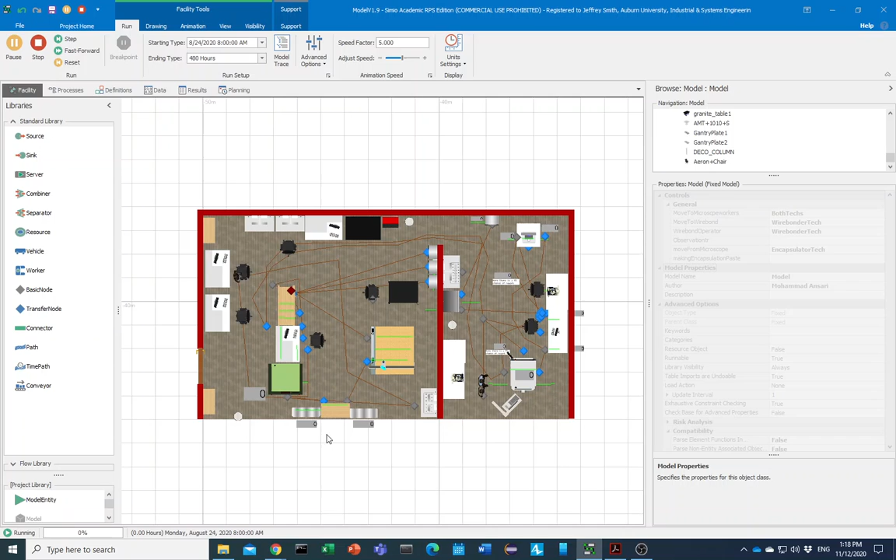So if we just play, as you can see, here are the cabinets that we keep the raw material, PCB, sensors, and base plate. So this is the base plate. After bringing all the base plates, they started bringing sensors, and now after that, it's time to just run the gantry. As you can see, we have 6 modules here. Let me just pause it here for a second.

So when the simulation started, as you saw, they brought 6 base plates and 3 base sensor plates of 2 sensors. Up front, they created a batch of 6 here. It will be sent to the gantry, and then one will hand the gantry. The other worker will start making the glue. After making the glue and attaching it, this worker is now working on the gantry again.

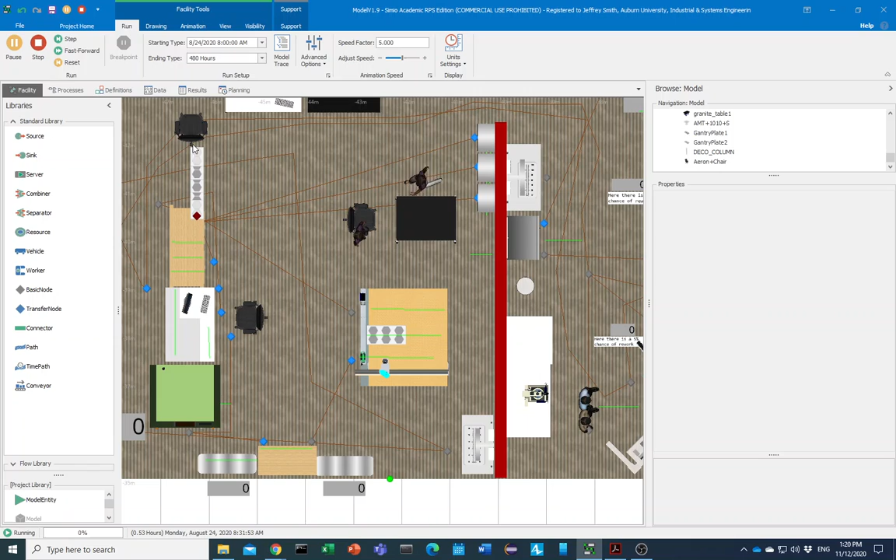This worker is free. It will go on and bring the next batch of the base plate and sensors. So if I just run it again, you can see that it's bringing up the base plate here. Base plates are coming one by one, as you can see, and after bringing 2, they create a plate of 2. But sensors are bringing in the batch in a plate of 2 together.

So now 6 is ready here, so a new gantry plate is ready, but the gantry is busy. After the gantry is done, which takes about 30 minutes, this one goes to the gantry. This worker will start making glue, and the next worker here will actually start working on this. So this model, we have 3 batches instead of 2, just to show the capacity of the system. You can change it, and I will show you how.

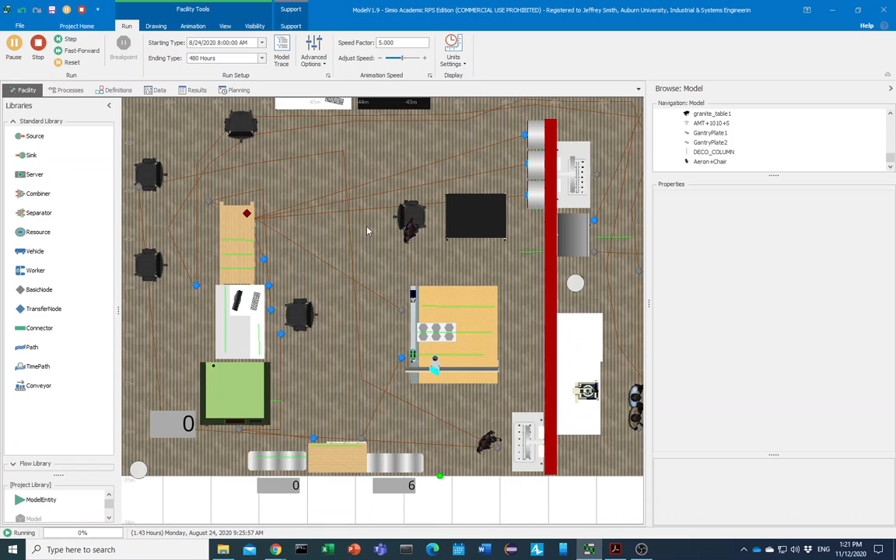Again, another batch of 6 will be coming. 6 base plates, 6 sensors. Then this one ends, which takes about 30 minutes in simulation time, as you can see here. So it should be any minute now. Yep. So again, a request for making glue, a request for going to the gantry and handing it. So the first day, 18 proto modules will be created. After these are created, they will go to here.

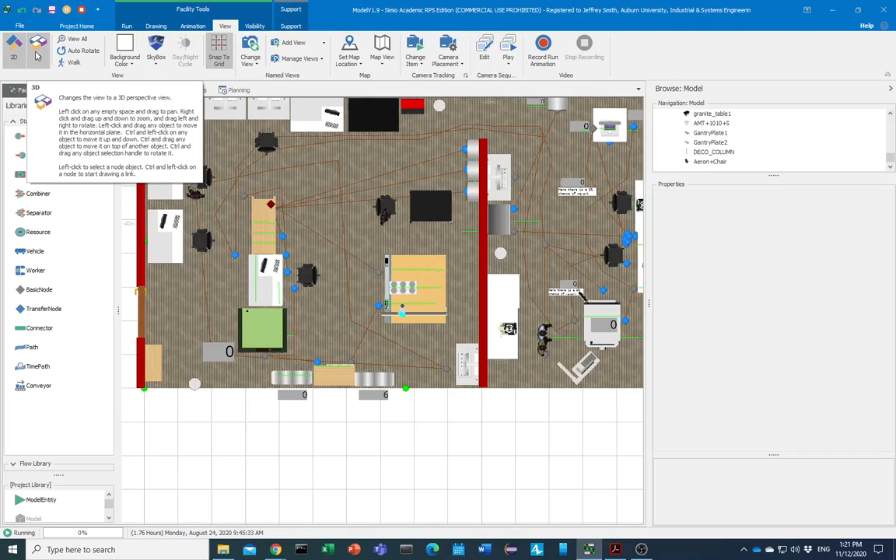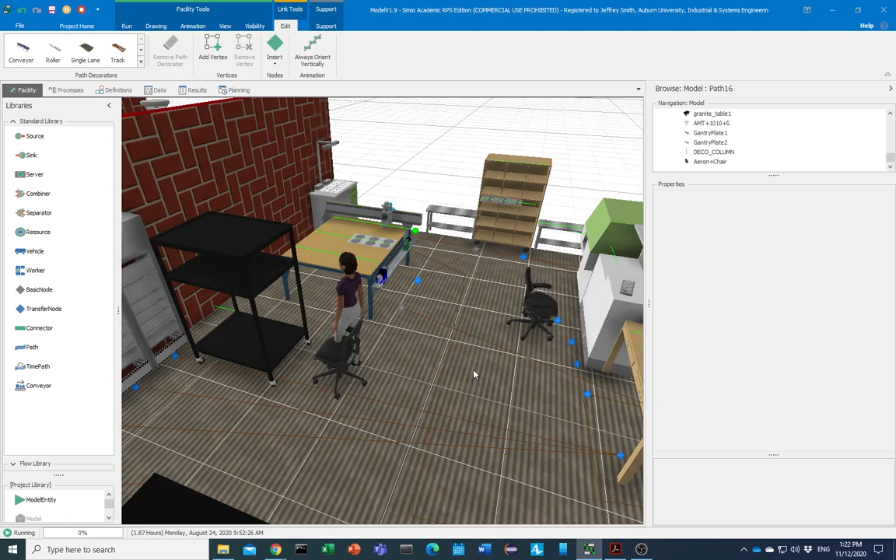So when they're done, I'm just going to go to the 3D model of the system. I tried to make this model as close as possible based on some of the 3D models that you sent me, and some based on the layout, the closest to the actual shape. So this is the gantry. The worker is here. If we rotate this, you can see that after these are all created, they will go to this cabinet here, and they will wait for the next day.

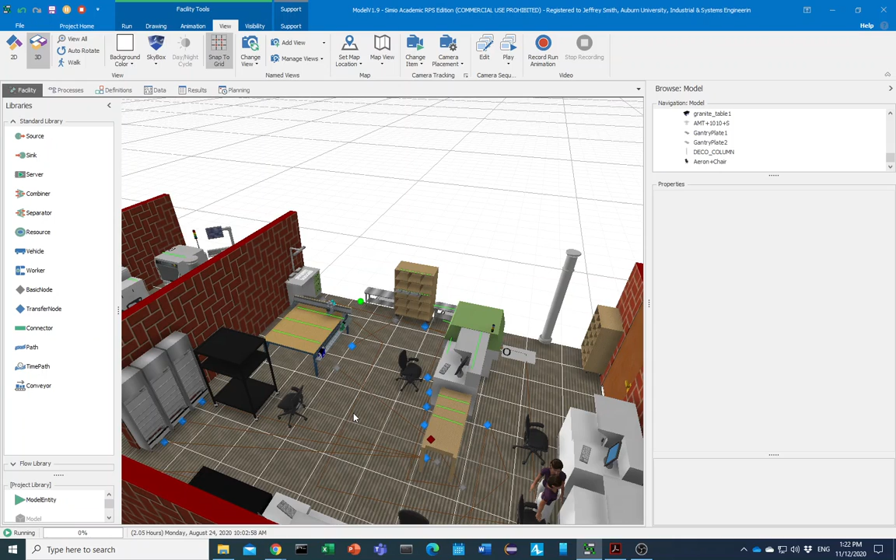This is the curing phase, which is happening. This will take another few minutes. Well, it's done. Now both workers are idle. They don't have anything else to do. They created 18 proto modules, but because this is the first day, they don't have any proto modules left from the day before. The rest of these as they were in the model here, they don't actually do anything. They're just kind of like cosmetics.

So we're going to go to the next day. I'm just gonna do it in a step, and a step will jump to the next event that will happen in the system, and I increase the speed to really fast. The next event that happens in the system is 8 a.m. tomorrow. So we run it with the speed of 5000. Well, it's now 8 a.m. of August 25th. It started at August 24th. So we decrease the speed to 5 again.

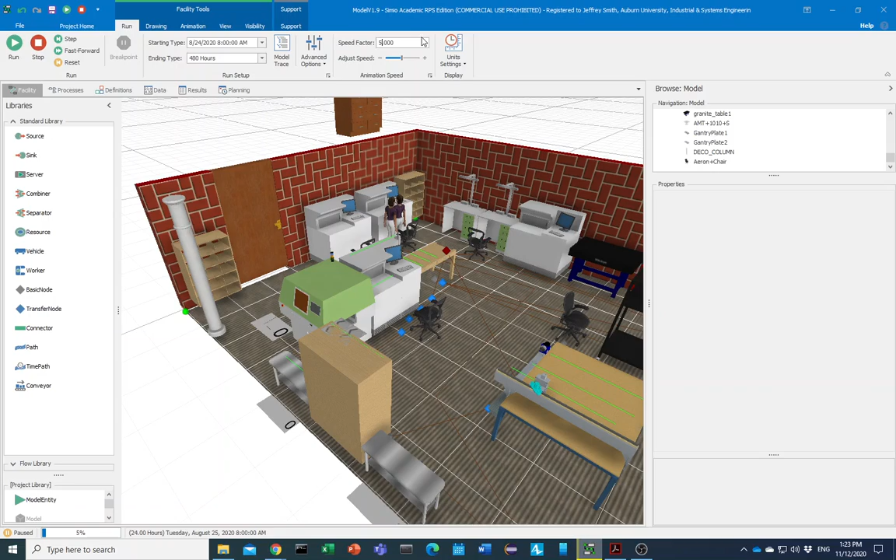So now what we need to consider is that we have 18 new modules coming in. Sorry, I just wanted to not show the links and nodes to make it more clean and clear. So yeah.

So the next day we have 18 new, 3 batches of 6 new products coming in, and we also have 18 in the system right now. So as you can see, this is the number entered into the queuing. We see that there's 9. So the numbers that entered in the queuing are in plates of 2. So 9 plates of 2, 18 entered to the system.

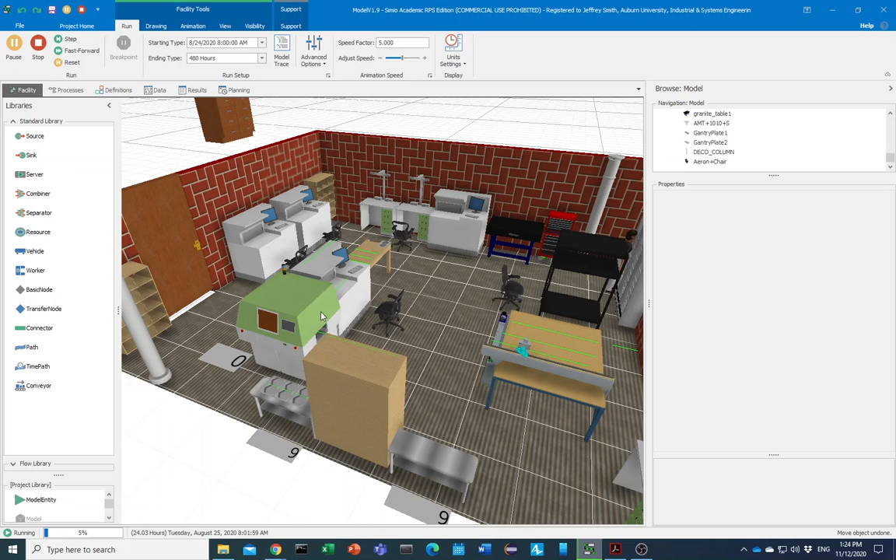And then let's start playing. So then the 18 from the next day are out, and they're waiting to be sent to the OGP, and we'll check for the quality. The first thing the workers do, they will start with the new batch here. They will bring up the new products all the way here, as you can see. And when they are moving sensors, they move way slower, because the sensors are more sensitive. Then a worker will pick something from the queuing, send it to the OGP, and start working on

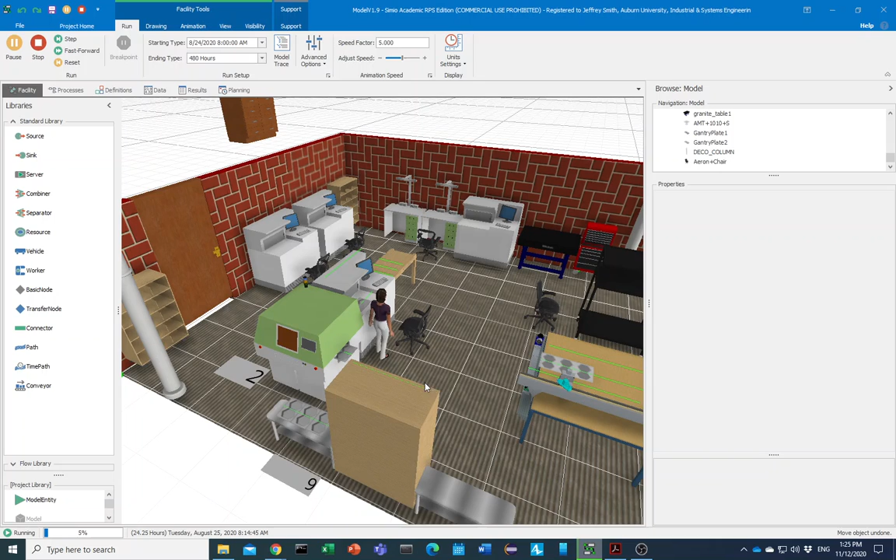the OGP. So as you can see, there are 2 products in the OGP right now. One of them is waiting, one of them is processing, and this is the output line. So one of them is waiting to be processed, one of them is actually in the machine. The one that is done goes here again. This worker is making the glue, the other worker is actually going to look over the machine and the gantry.

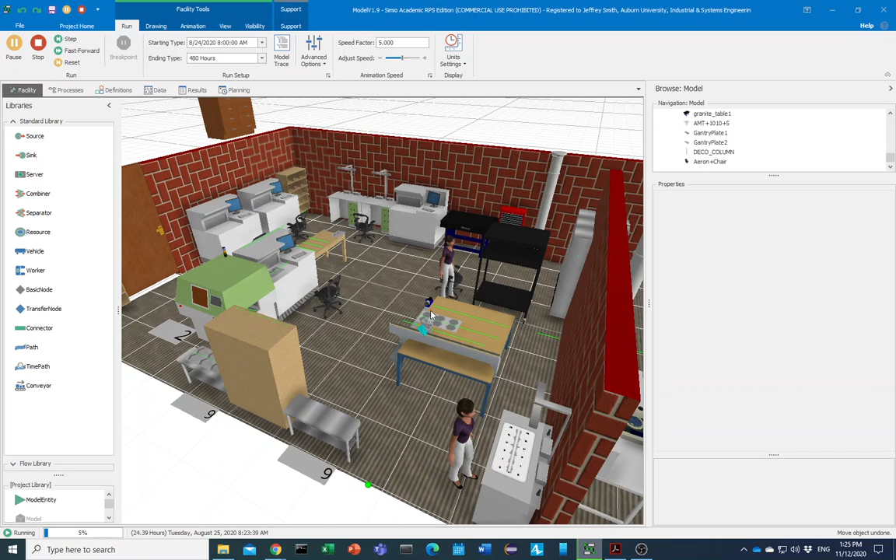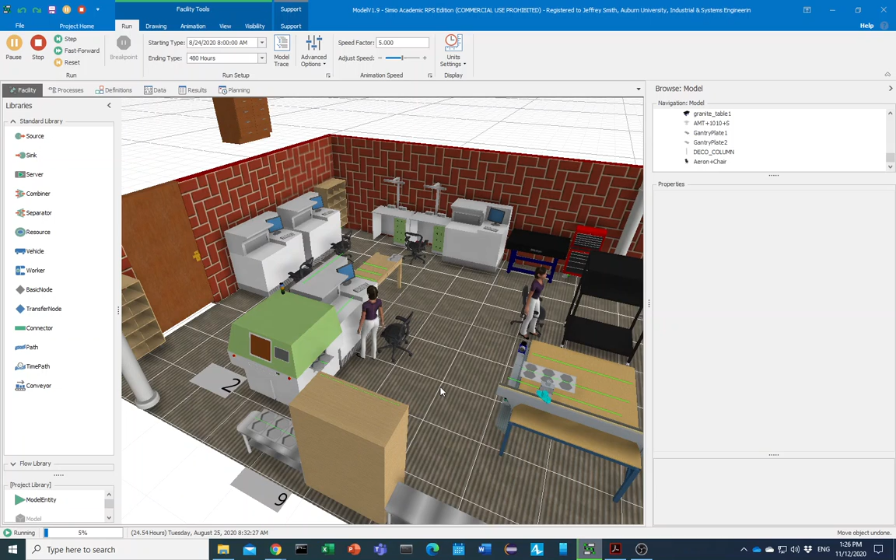So making the glue is done. Again, working on the remaining products that were processed and cured the night before. So the sequence of the jobs is not completely random right now, but they prefer to do the new modules first. But sometimes during their walk, they actually hand something on their way here, and then pick up some new products here. So as you can see, after handing whatever it was here, they started picking up new products.

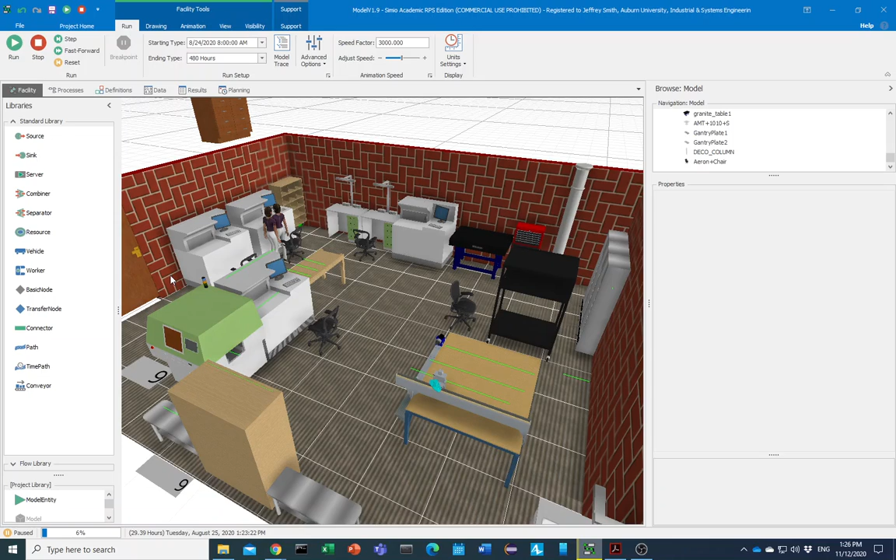So again, the second day we will not have anything going on in the second room, because we don't have any modules ready yet. So this sequence continues for the rest of the day, and let's jump to the next day. So we just increase the speed to 3000. Okay, this is 25 still, so we just go through, and as you can see, it jumps to 26 at 8 a.m. and stops. So let's just reduce the speed.

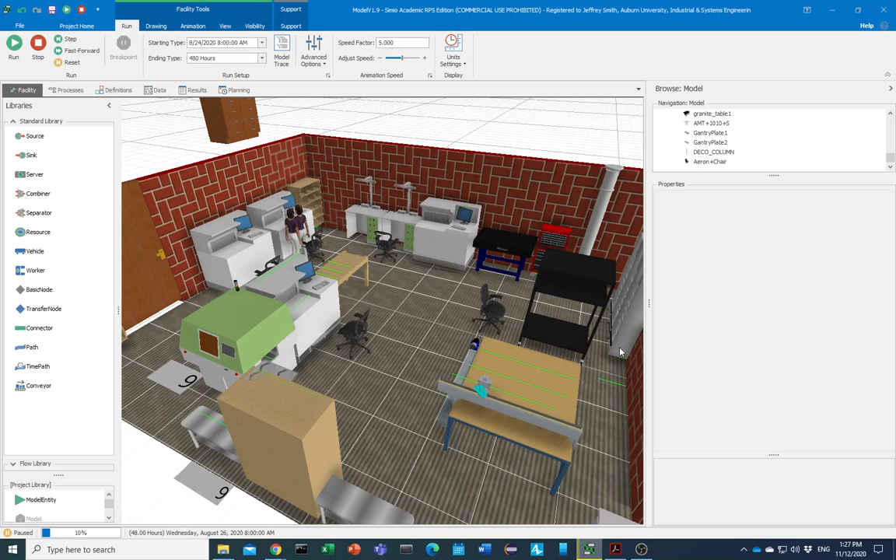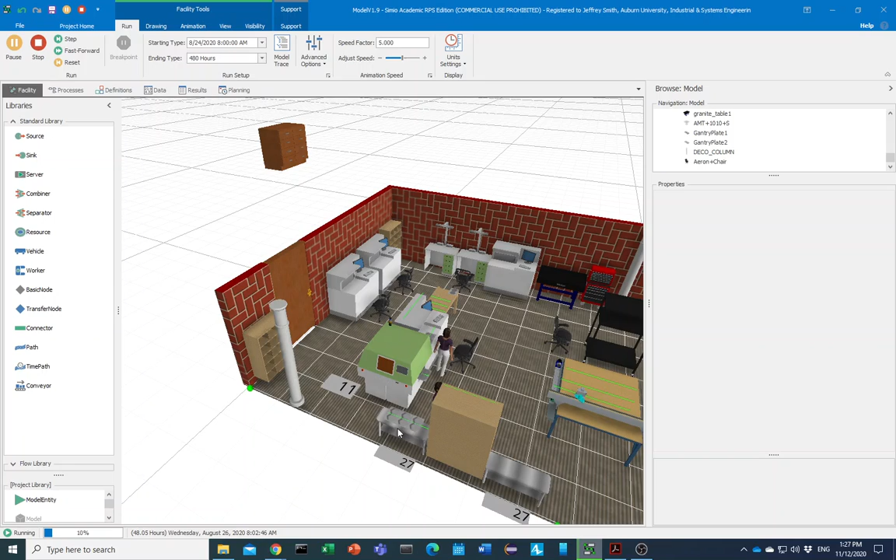So now we have 18 proto modules in the system, and we want to create 18 new proto modules. The gantry still works the same, but the thing that changes is the OGP, because the modules will be tested again before they are picked up by someone from room 2. So if we run it, we see that they will bring some of the products here. Then the priority is with the new product, so they will bring all modules, not proto modules. The modules, as you can see. Let me just pause it.

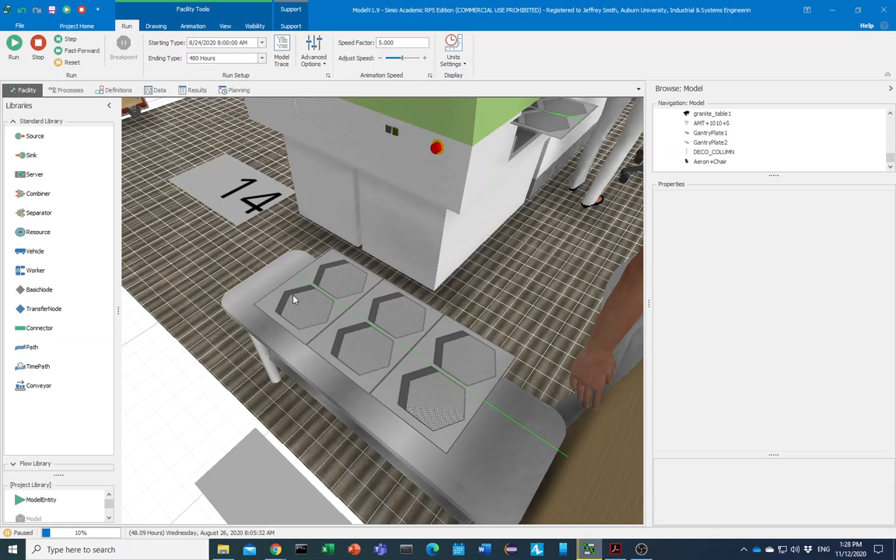As you can see here, the modules are 3-leveled, which shows the base plate, sensor, and the PCB. If you take a look at the modules here, these are the proto modules. They have 2 levels, just the PCB and the sensor. So this is how you can differentiate them. And for example, here these are just base plates. And if you hover over them, it actually shows that this is a base plate.

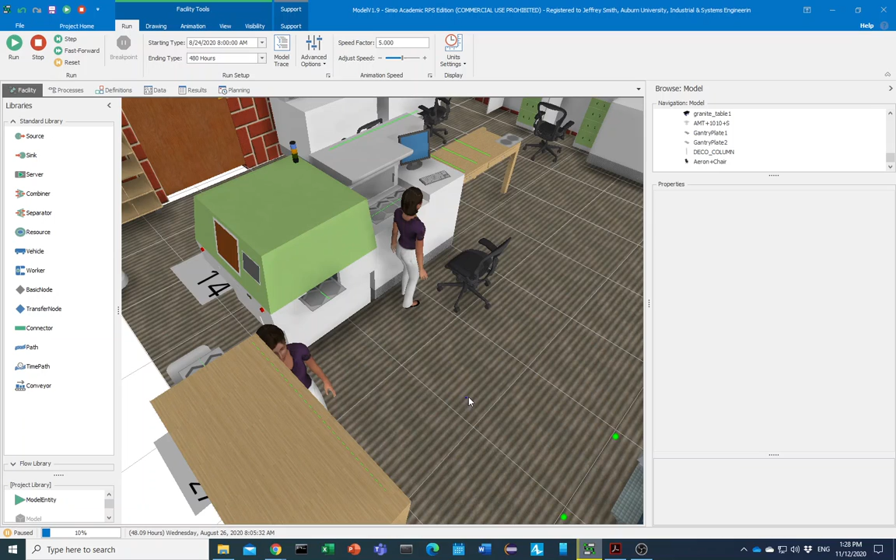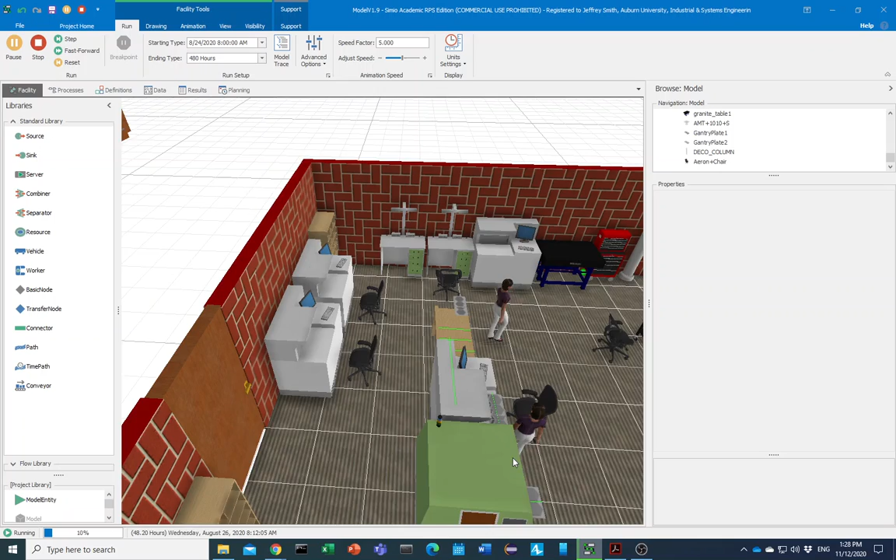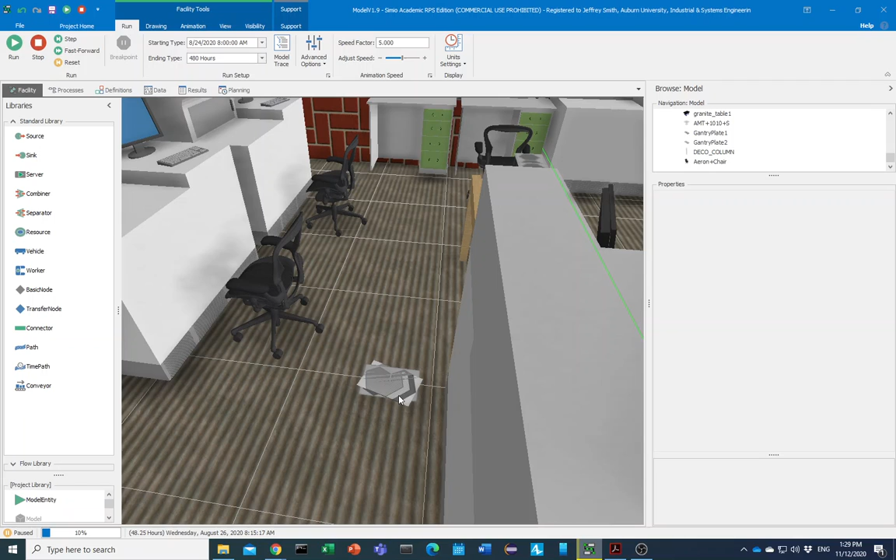Okay, let me just play it out a little, see how it goes. Again, they're bringing the modules into the system. They're picking up from the output here. After the module is checked for quality by the OGP, we will see that the module will go somewhere here and wait. So as you can see here, they are created. The OGP checks the quality 2 at a time in a plate, but after they are checked for quality, they will be separated into individuals. So 1 plate was checked, 2 modules will be created here.

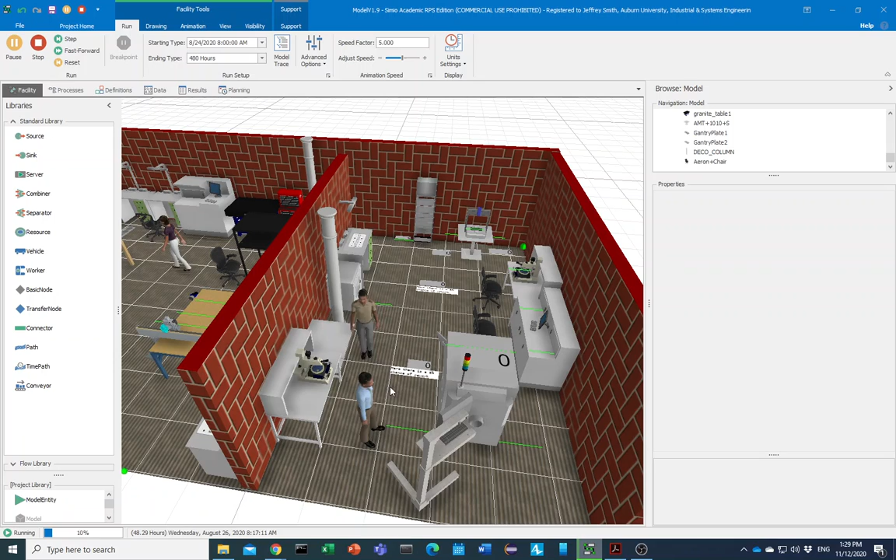After the 2 modules are created here, a worker from room 2, the wire bonder, not the encapsulation worker, will come here and pick it up. Comes here, picks it up, and carries it all the way here to the wire bonding machine. So he mans the wire bonding machine. After it's done, he will give it to the observation microscope desk.

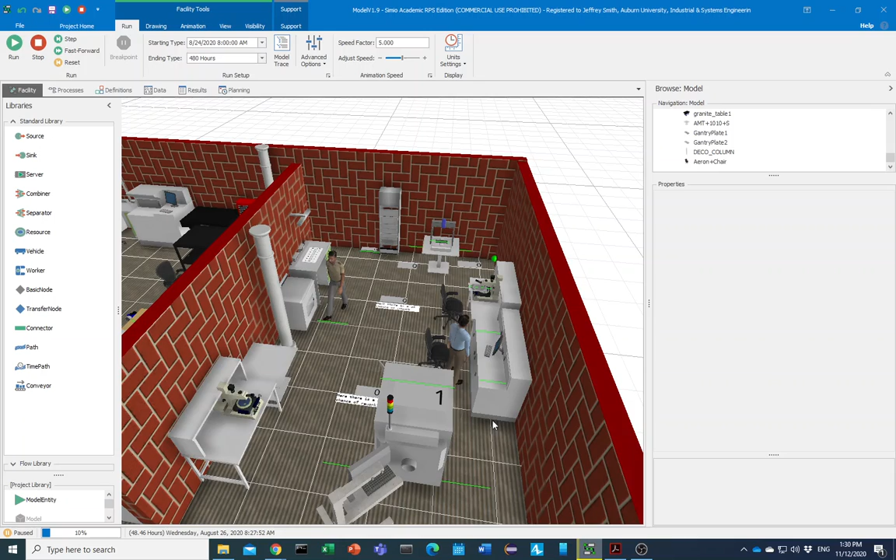So as you can see, the encapsulation worker doesn't have anything to do right now because he's waiting for products to come in. So we wait a few minutes, then it goes to the observation microscope, and it will check for the quality. And as you can see, this is the input line, so all products that need to be checked wait here. If they are being checked, they will go under the microscope here, and if they are checked and done, they will wait here to be sent to the next station.

So we will see that it will be done in a few minutes. Then after it's done, it will be handed over to the input of the mini gantry. The thing with the mini gantry is we have a limit, so it needs to reach a number of 4, 5, or whatever before the mini gantry starts working, because the paste gets viscous after like 60 minutes. So we just wait for a specific number to get there, then start processing everything.

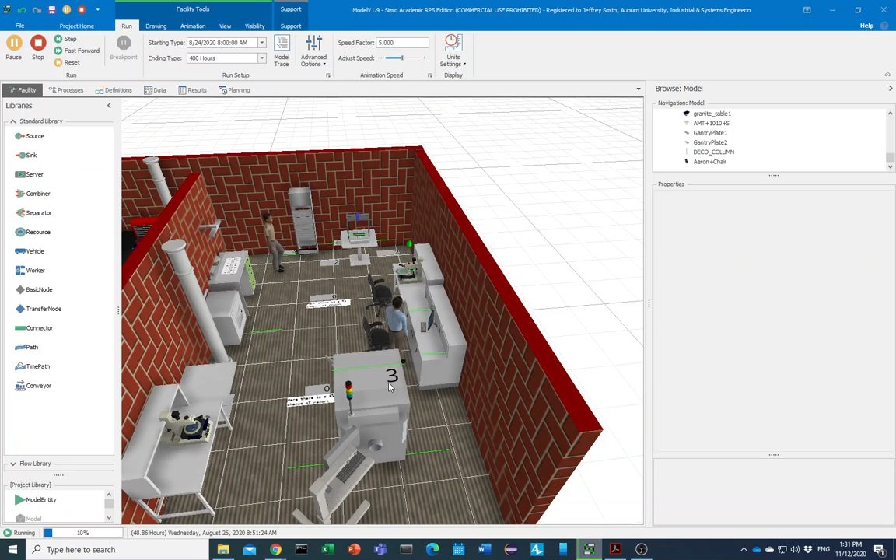Right now you can see 2 numbers are already in. This is the total number that entered the gantry, and this is the current number in the mini gantry. There are still 2, and 3 have been processed well, 4 right now - this is the 4th one. The first one is being wire bonded, and as you can see this is the proto module, empty. After it is wire bonded, I added these antlers or legs to the module to show that this is the wire bonded module, not just a simple module.

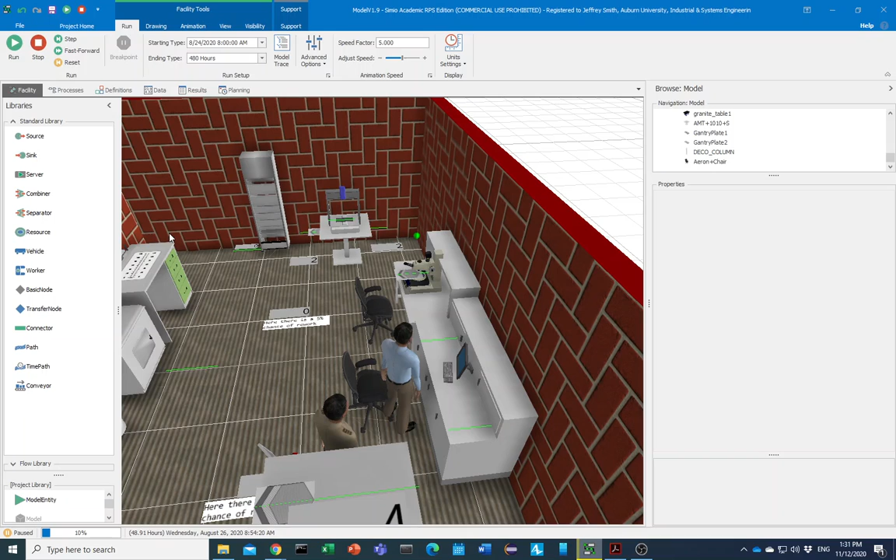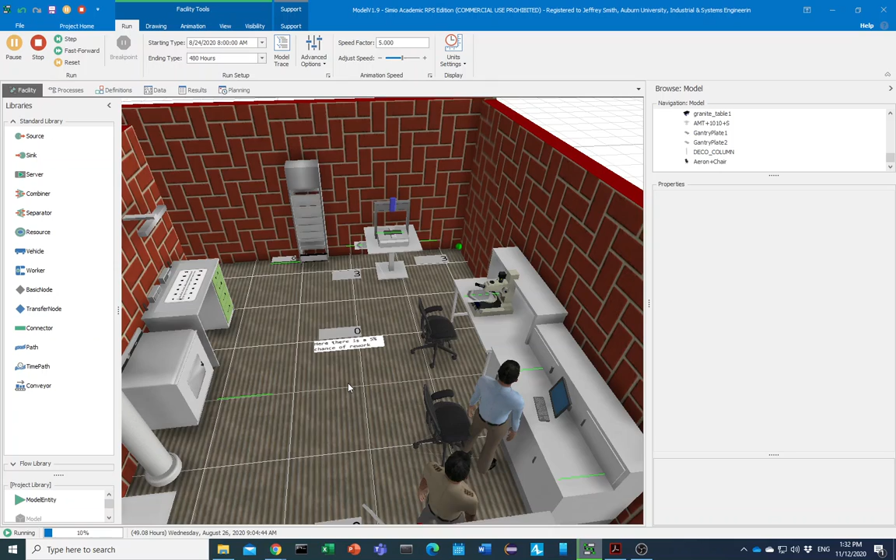Let us run, it will go. It's 3. Right now the setting here is 4, so it needs to at least get to 4 before it starts the mini gantry and makes a new batch of paste. So this is the 4th one, so this will happen really soon. After quality check and passed, then it goes.

When the 4 is met, the worker will go here to this station. He is making paste right now. After making paste, he will go there, attach the paste, get the paste to the machine, and start manning. As you can see, this is the amount of paste we have.

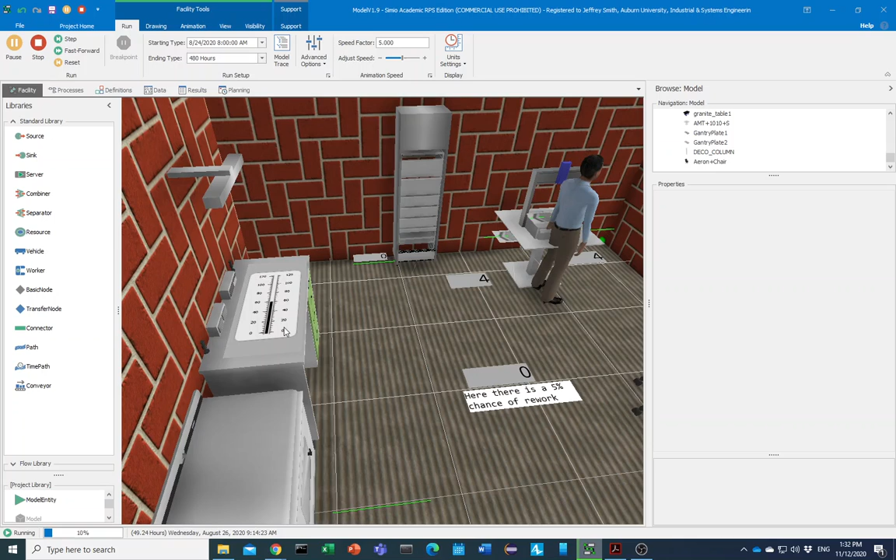So we consider that for each module we consume 20 units of paste, and the paste created is based on the number of waiting. So at 4, 80 is created. Right now 1 is here, so 60 is remaining. As every unit goes through this mini gantry, you will see this 60 drop to 40, 20, and 0.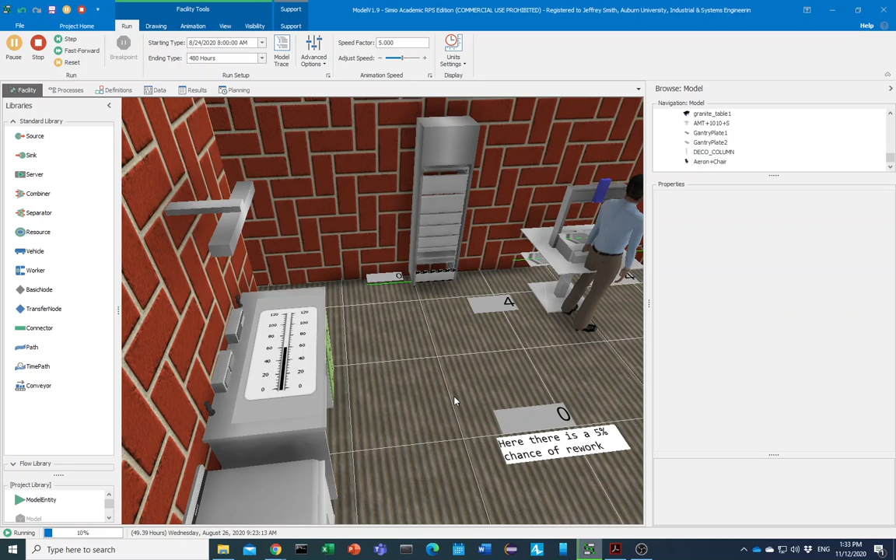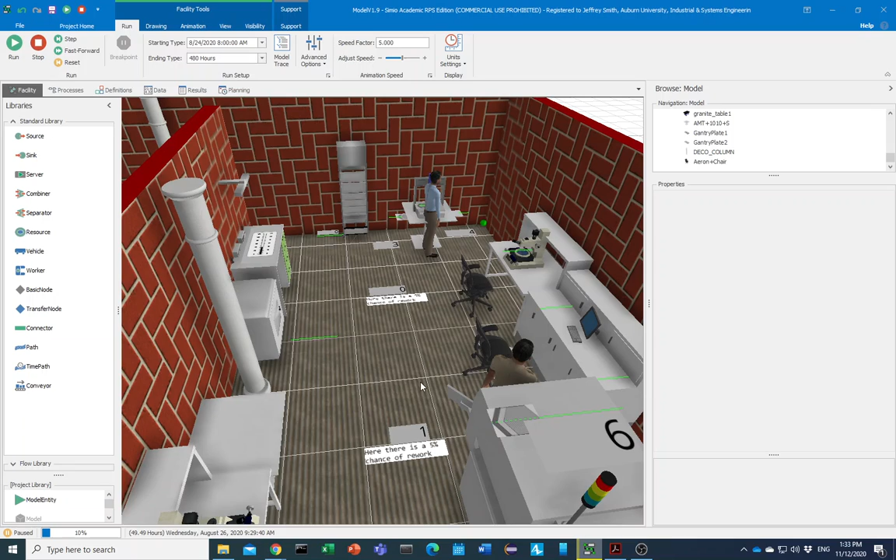This is the number that shows how many didn't pass the quality check for the wire bonder. There is a 5% chance that a product doesn't pass through the quality check or observation microscope for the wire bonder. If the 5% happens, this product will come back to here, and the total number processed by this machine will be increased by 1. So the total number without anything should be 18. If there is a rework of 1, 2, or 3, it will be 19, 20, or 21.

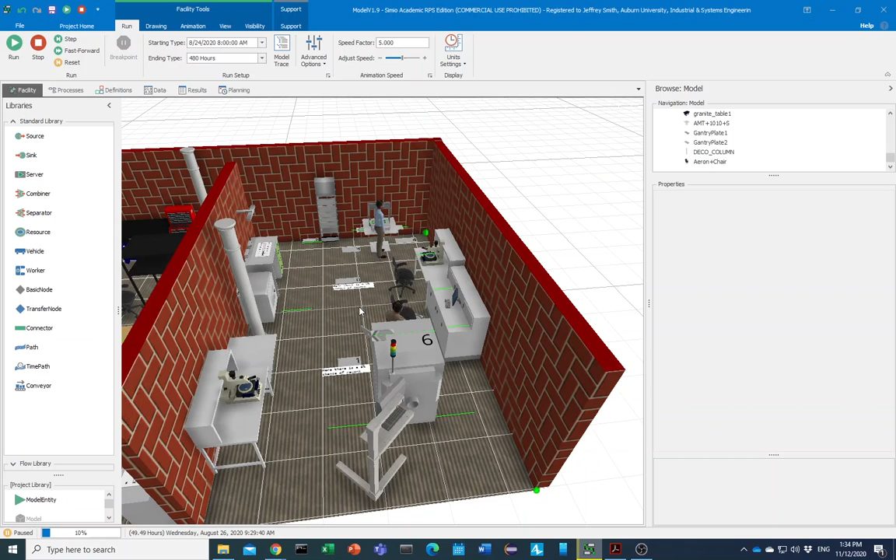The same happens with the mini gantry - let me just play it. With the mini gantry, after it is done, it will be checked for quality. If the quality doesn't pass, it will go through and come back to the input of the mini gantry. So now the wire bonder is checking the quality in the observation microscope. We'll go through and show how it is set, but the observation microscope is a shared unit, so both can use it.

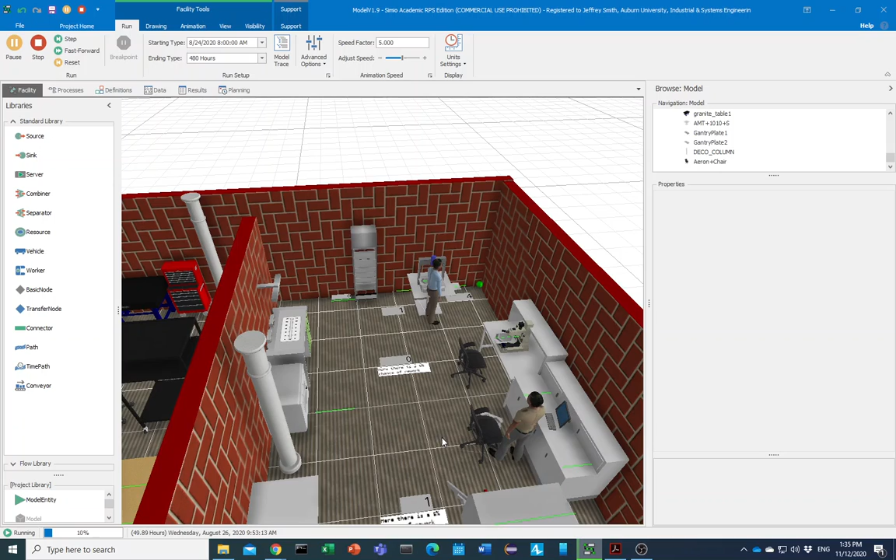The wire bonder is specific to wire bonder tech, encapsulation and making paste is encapsulation tech, but this station is shared between the two. We'll show you how. After he is done here, he's checking the quality. If it passes, it will go. If it doesn't, this will be 2. But it did pass, and it went to the next station.

As you can see, the worker is bringing everything from the output of the gantry to the input of the observation microscope again. For a brief moment, the encapsulation tech didn't have anything to do, because the wire bonder tech was actually finishing the thing it started, and there wasn't anything else to do.

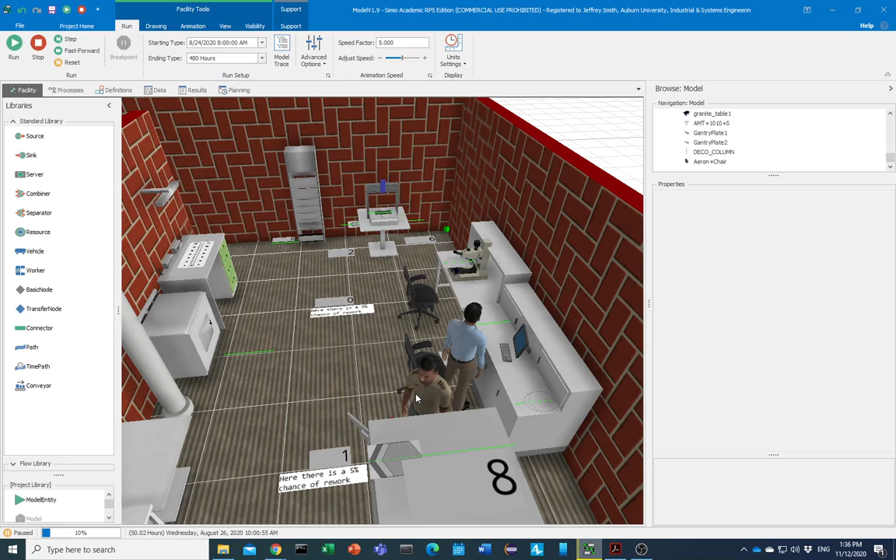There were two wire bonded modules waiting on the gantry, but again we are waiting for it to reach the number 4. After he is done, he will continue working his products and bringing everything from the other room. He will pick up where he left off on the observation microscope.

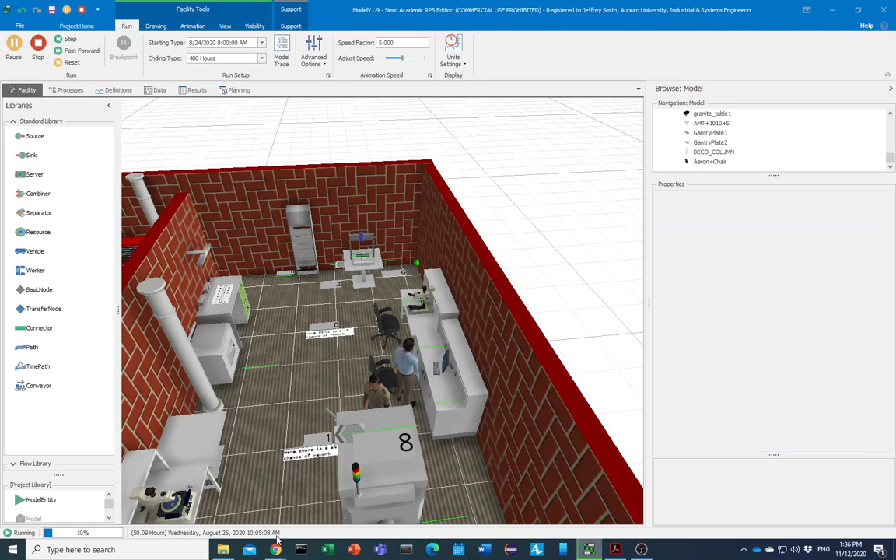So this continues, and as you can see, you can always check the time here. It's 10:05, 10:06, and it just goes. So we're just going to increase the speed.

After he's done checking the quality, the products that were the output of the mini gantry - meaning they were encapsulated and passed quality - will go to the heating chambers. They'll be handed over to the heating chambers, and the other products will go to the input of the mini gantry. A new product came in and he's processing it.

It will be the 4th one, again making the paste and working on the station. I'll just increase the speed. So it's the same sequence of product starts.

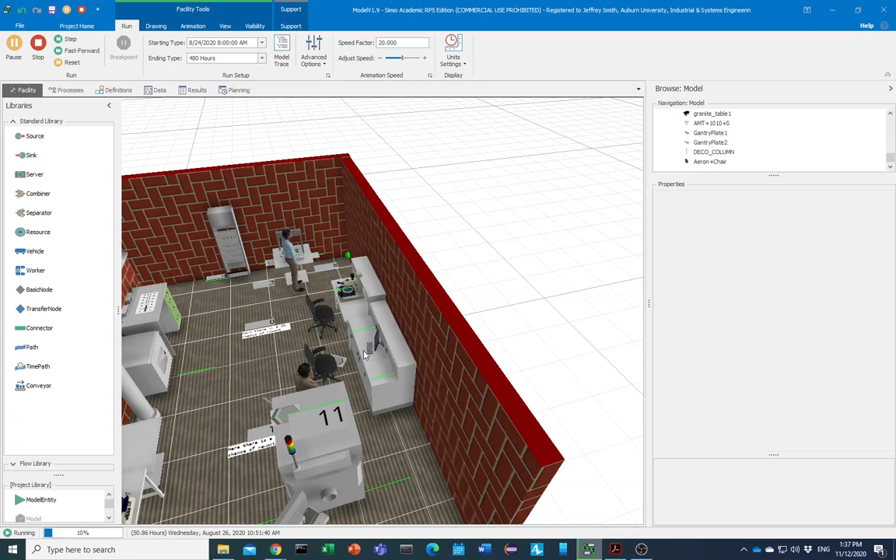If this worker is busy, someone else will pick up the leftover and just go to the OGP, the observation microscope, and finish what he started.

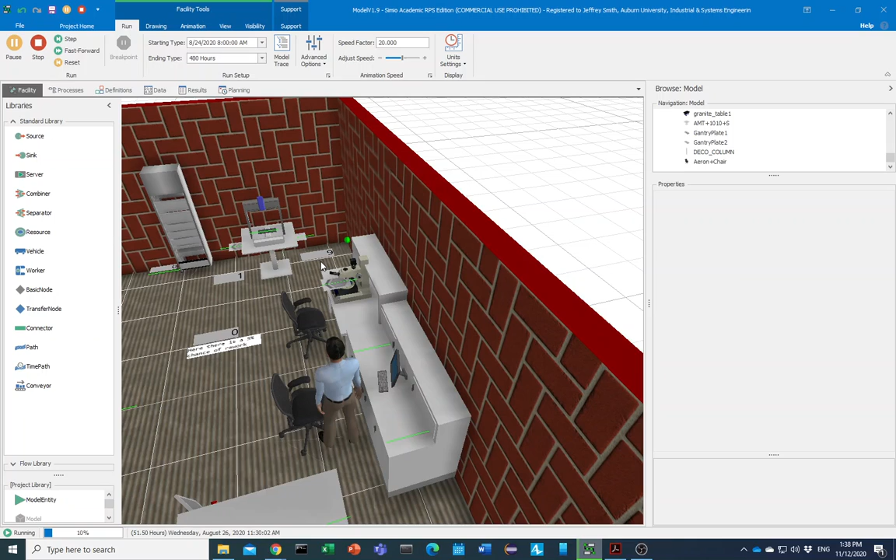This continues until it reaches 12 o'clock, which is off-shift, and everyone will kind of wait somewhere else. They finish up whatever they have started.

It's 12, but this one is working because he started on a product. After he finishes, he goes to this. You saw for a brief moment something passed.

These are the objects that just finished their time in the heating chambers. They just go to this one - they weren't handled by workers. It could simply be added by that, but it wasn't in the document, so I left it out.

He will continue working on the rest of these modules and finish up with his work.

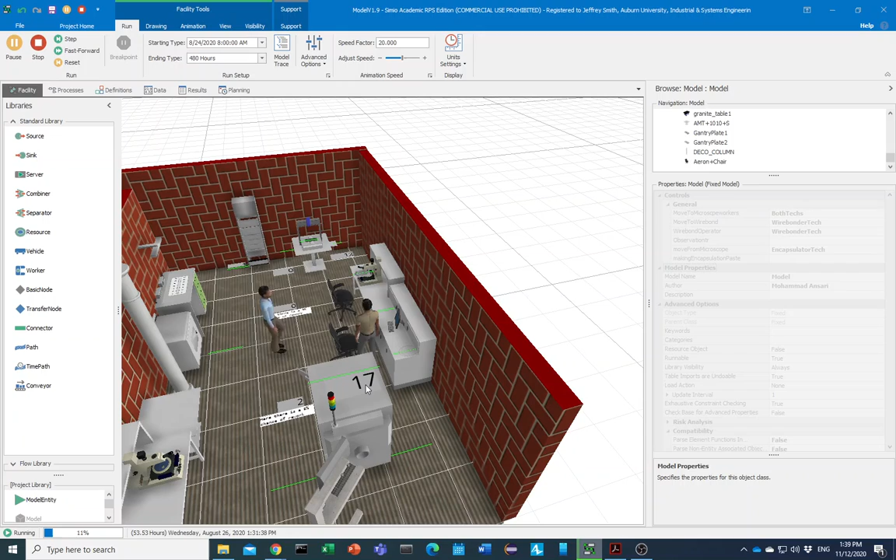Now we have 2 reworks here, so the total number - well, 3 reworks. It's a lot considering 18, but it's just chances, 5%. So the total number here should be 21, meaning 18 products were wire bonded and 3 were re-wire bonded, so it will be 21.

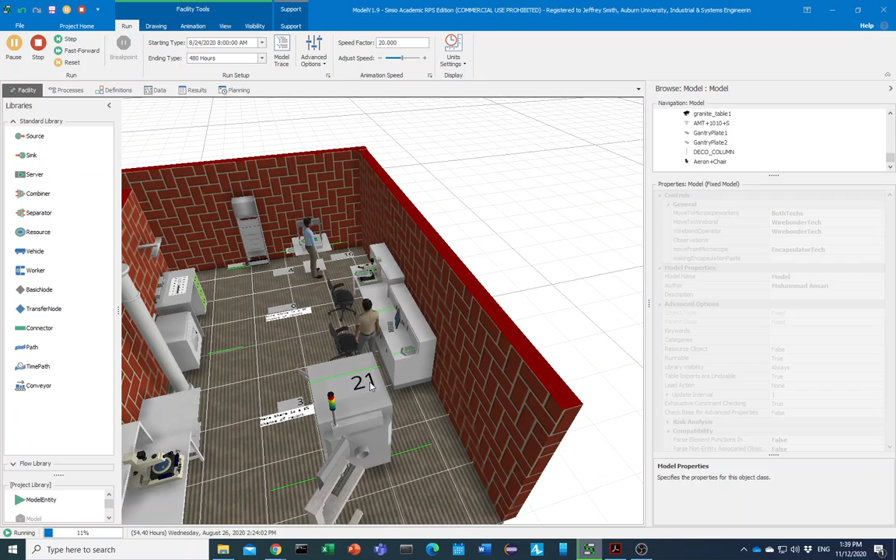After 21, this worker will be done. He will go over to the other microscopes and he's done with everything, because the other parts aren't shared between the workers. So this worker is done for the day. He wire bonded everything, and the queue for this one was done - now the new batches of the gantry come out.

I just added a breakpoint here, so I'll explain the breakpoint as well in a few minutes.

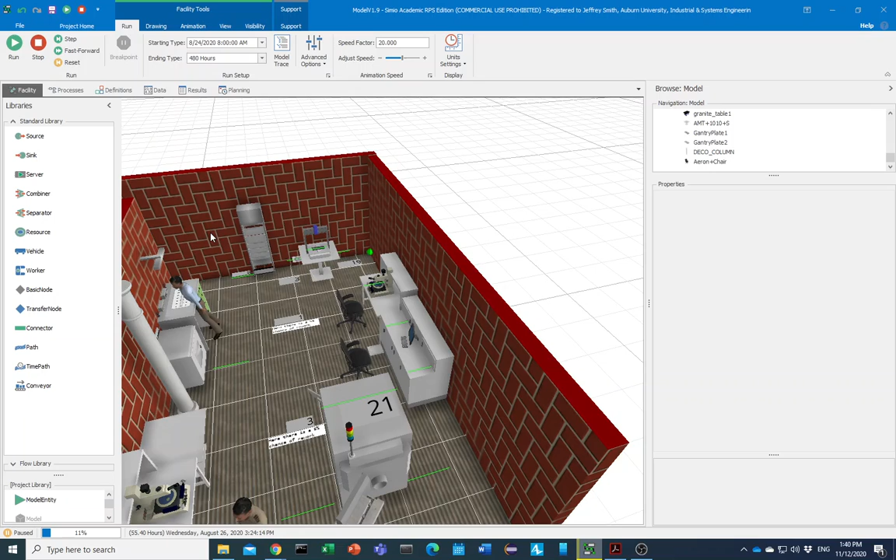Look, we have 3 remaining, but the encapsulation tech will go over and create a batch. This is the last batch of the day.

For the last batch of the day, even if it's 2 or just 1, he will make paste, mix paste, and work them out and finish that. Although they don't meet the requirement because they're the last few in the day, they will all be processed.

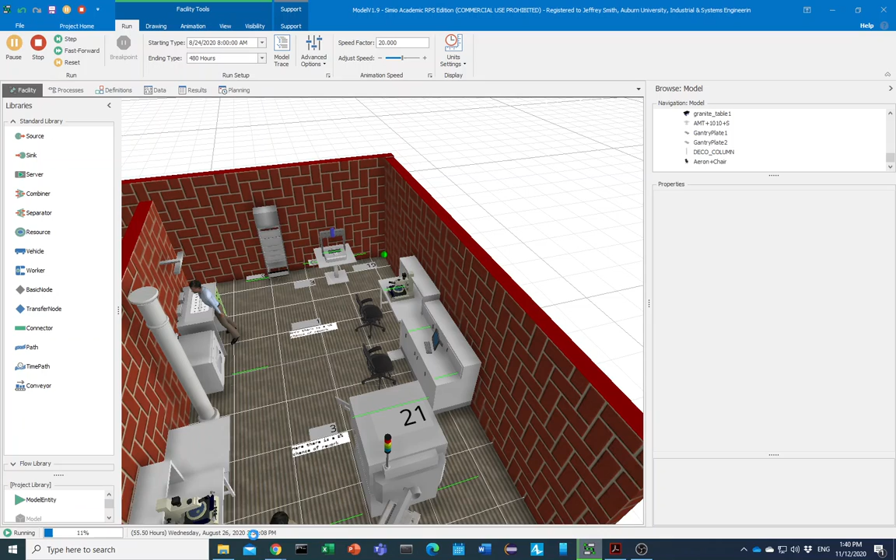So it's 3:25, they have only 5. As you can see, because we have 1 rework here, the total number will be 19 rather than 18, because 18 products were encapsulated. 1 was re-encapsulated because of the quality of the product - that module didn't pass the quality check.

So again, working through everything. I will go through the breakpoint and what it is.

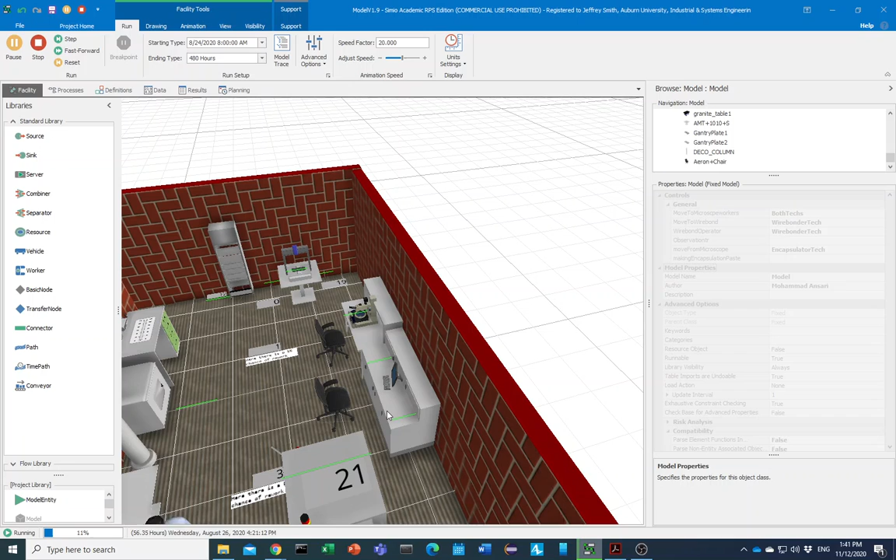We'll do the remainder here, and done. It's 4:20 something, and 18 products were produced. So this is the whole manufacturing system in line.

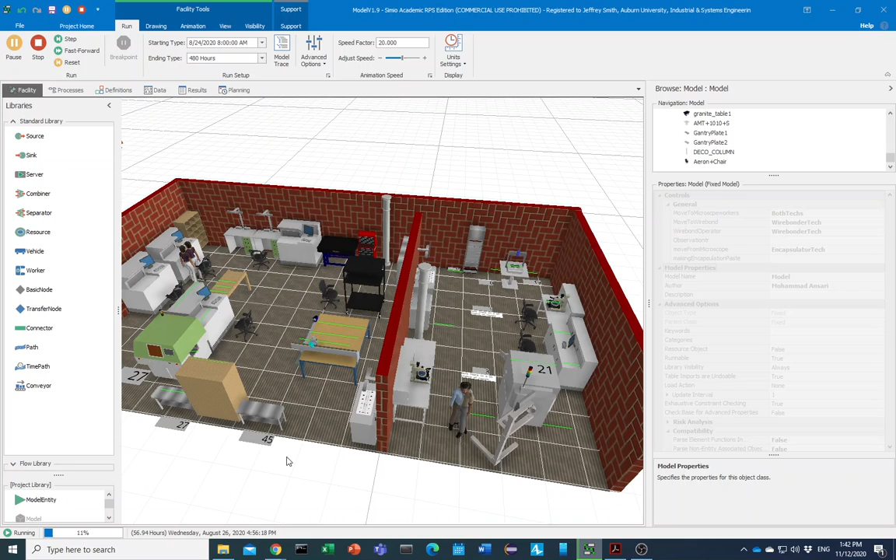The same thing happens every day. So the next day, again, the same sequence and same products happen. These labels help us keep control of what's happening in the system - how many entered, how many are in each station, and stuff like that.

So this one here, 12 already exited. We are still waiting for another, like, 6. It should be like 2 exited, another - because the heating chambers take 2 hours. So this should be 18 at the end of the day - 18 entered, 18 will exit. If there's a rework or whatever, they'll increase the workload on the station, but they're not a new product. So again, 18 will exit.

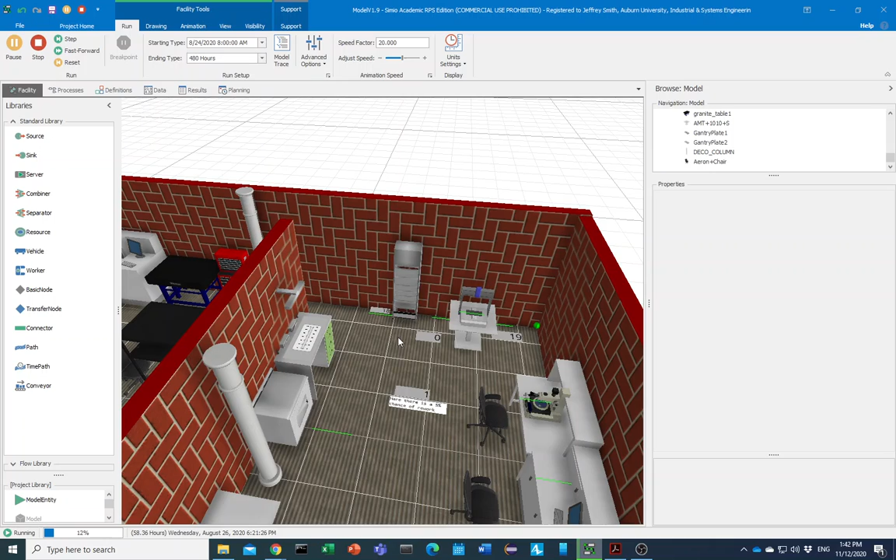So if we wait... well, 18, and now everything is done.

So this is the whole system, and everything can be manipulated, and different layouts can be incorporated. But this is the layout that we have right now. Let me go through the bit of details in the next video.